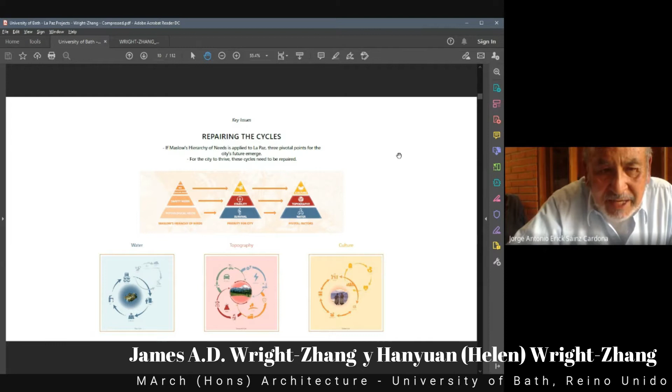So one of the key aspects we identify is water, and that poses the most existential threat to the city. Una de las primeras cosas que ellos identificaron es el agua, es algo que es lo más importante.

Through our research, it is discovered that the rainfall level will be more extreme in the coming 10 years. En los próximos 10 años, el agua va a escasear más de lo que está habiendo ahora. It means that during the rainy season, the rainfall level will increase, and during dry season, the rainfall level will decrease. Yes, it's going to be more extreme.

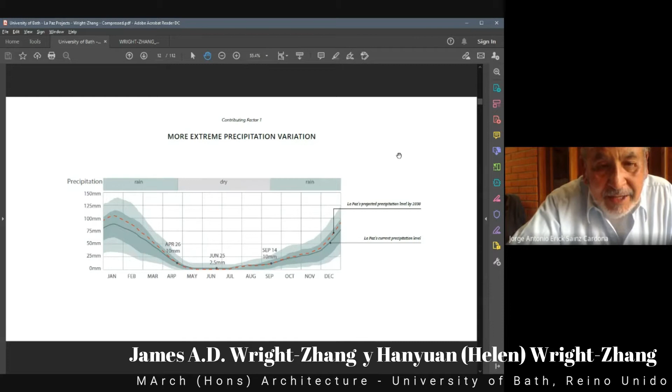And then the second contributing factor is the glacier melt. El hielo de los glaciares, de las montañas, va a bajar. Yes, and the research indicated that the nearby glacier has already retreated by 39% in the last 20 years and is predicted to disappear completely by 2040. Hasta ahora está reducida la producción, la llegada de agua en un 39%, pero se proyecta que para el 2040 ya no va a haber deshielos.

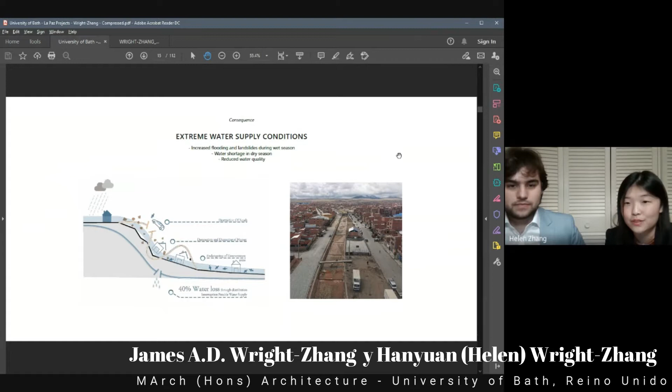So the disappearance will pose further threat to the La Paz water supply. Eso implica que está en peligro el suministro de agua a la ciudad de La Paz. And the third factor is the water contamination from factory, slaughterhouse, and living waste. La tercera parte es la contaminación del agua por los desechos y también por la contaminación de las fábricas. So all the three factors together, we felt that it's essential that we act now to help solve the water supply issues.

And the next special character we identified is, of course, the topography of La Paz. Lo que han identificado es la topografía de La Paz. As we all know, La Paz, built on mountainous landscape, offers one of the world's most astonishing city views. La Paz city sees dramatic height differences at different parts of the city, for example, El Alto, Max Paredes, and the center of the city.

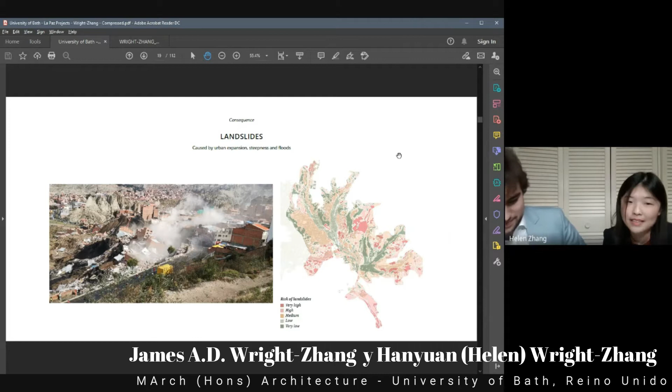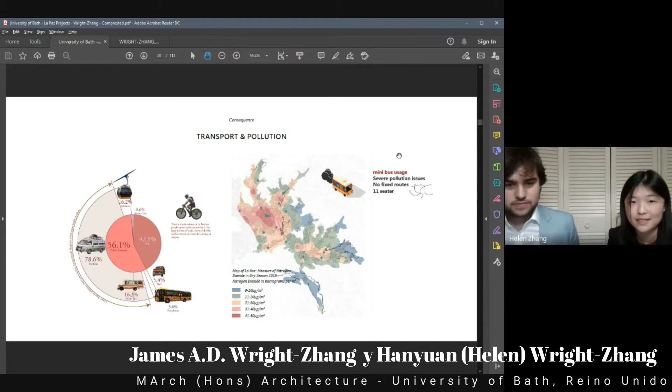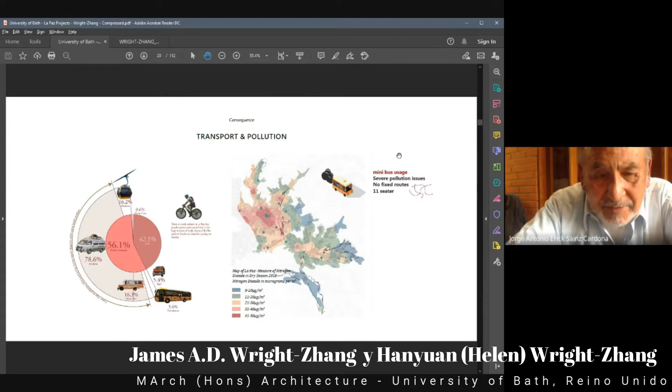However, it also causes issues. Together with urban expansion, the steepness and floods, La Paz has been experiencing a lot of landslides recently. A recently published risk map of La Paz indicates that much of the city is on medium to high risk of landslide. And the drastic change in levels, together with the use of minibuses, has also caused some pollution to the city center. Further, with the recent urban expansion, La Paz's greenery coverage has also reduced.

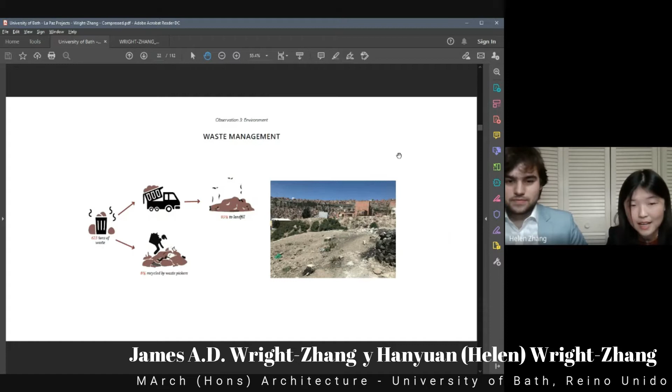Por el mismo hecho de la expansión de la ciudad en varias direcciones, ha ocasionado que la parte verde de la ciudad vaya reduciéndose considerablemente. Currently, La Paz has 3 square meters per capita of green space, and that's only a third of what the World Health Organization recommends of 9 square meters per person. And we also find out that only 8% of the waste has been recycled in La Paz.

And the third aspect we identify is the La Paz unique culture. Han identificado la cultura singular de La Paz.

As we all know, the Bolivian culture consists of a combination of Spanish, Incan, and other local cultures that make La Paz very unique in the world stage.

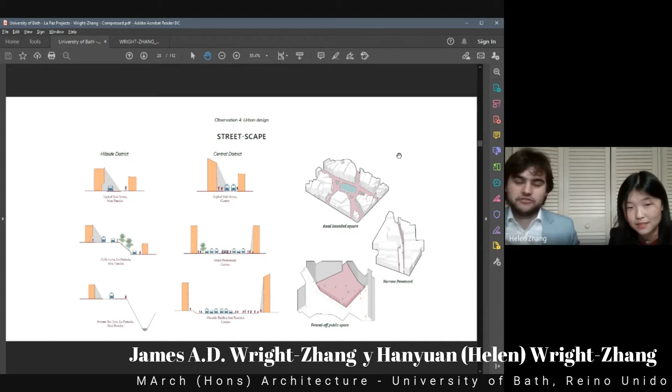What's the last part, Fran? I didn't... fenced off, have fences around them. Like, okay, I got it.

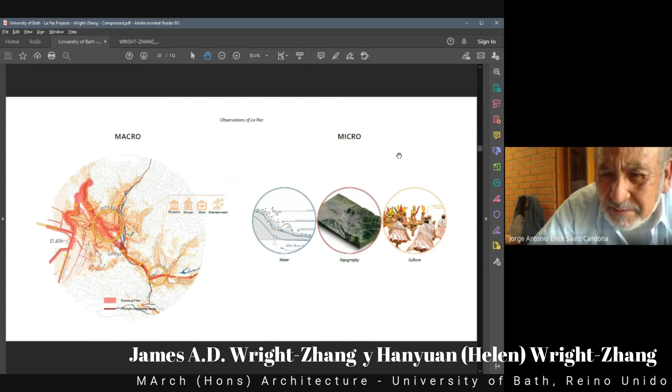Did you give me the three factors? Yeah, three factors we identified that we found to be most special about La Paz.

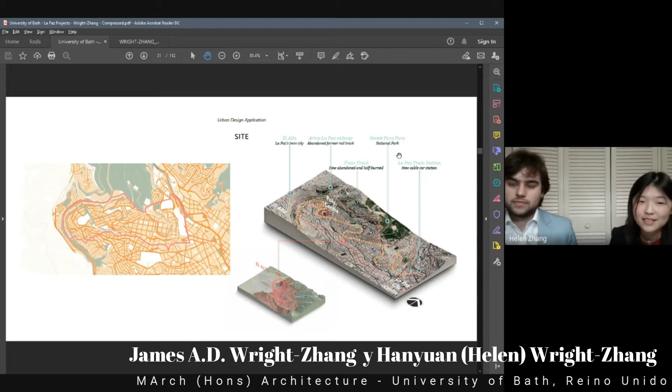We picked it because we felt that the site represents the three characteristics we identified of La Paz the best.

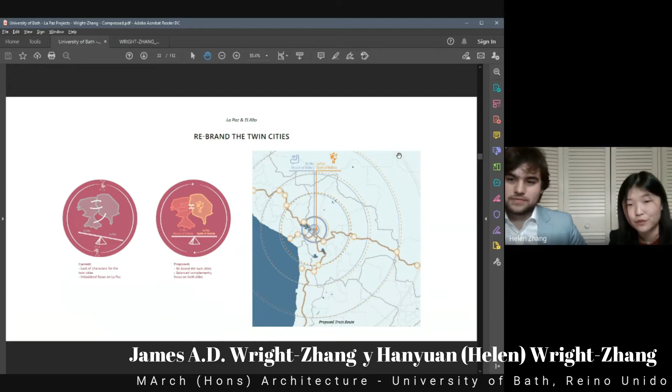For each other. And we also want the reintroduction of the train route going across La Paz, so that we can spread out La Paz and El Alto's influence not only to Bolivia but also to the continent.

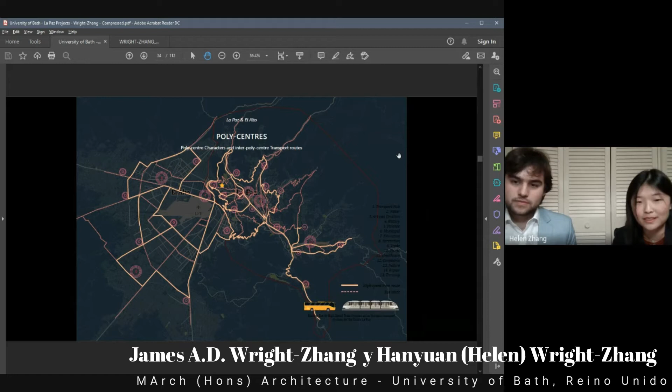And each polycenter can be linked with new public transport links such as bus or high-speed tram systems.

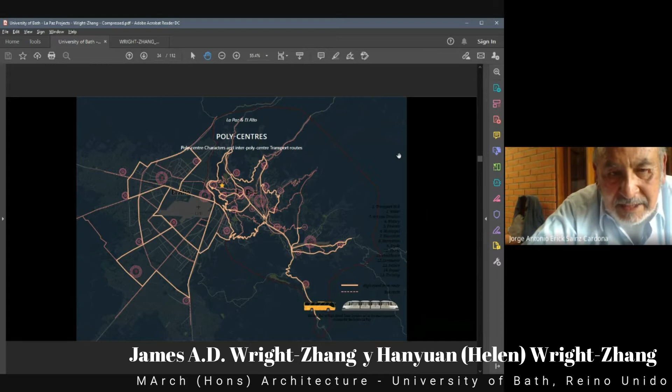And we are hoping to maximize the gateway location of our locale as the key linkage between El Alto and La Paz City.

You are hoping to what? To maximize the gateway location character of the locale as a key linkage between the two cities.

Yeah, my problem is I didn't understand the second part. Could you? So to essentially increase the connection between La Paz and El Alto through La Portada. A través de la portada quieren incrementar la conexión entre La Paz y El Alto.

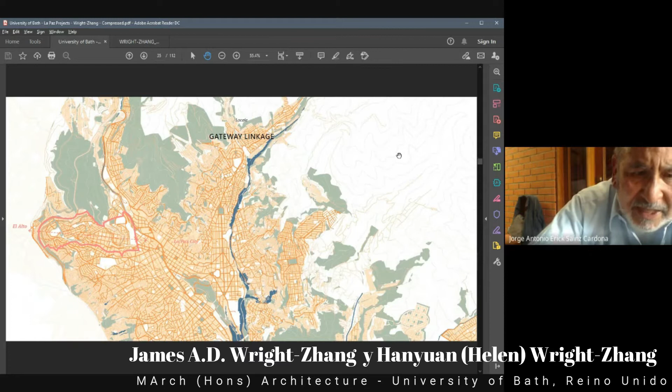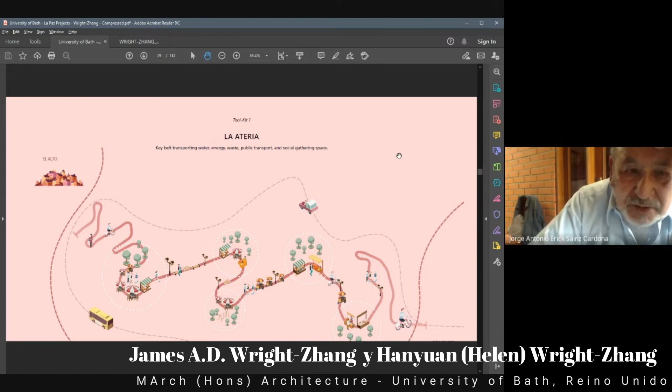And the second toolkit is the idea of superblock. Superblock is a series of 15-minute living zones providing essential service for the communities nearby. How many superblocks? We are proposing 10.

Okay, proponen 3 bloques. Within each district, a polycenter being a bigger superblock providing more district-wise public service. Alrededor de esos superbloques hay un superblock central que va a dirigir todo lo que hacen los otros superbloques pequeños.

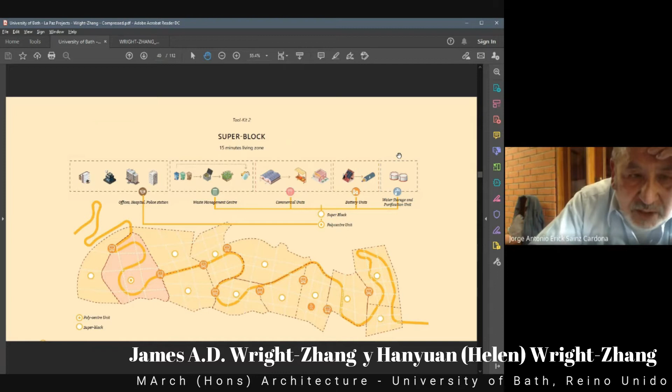And all the superblocks will be connected by the central artery. Y los otros superblocks estarán interconectados por el superblock central.

The superblock idea takes precedent from Barcelona. In Barcelona, they connect 9 blocks together as a mutual superblock and increase the pedestrian-friendly streetscape for the users. Tome como ejemplo Barcelona, donde han puesto 9 superblocks para facilitar el transporte pedestre.

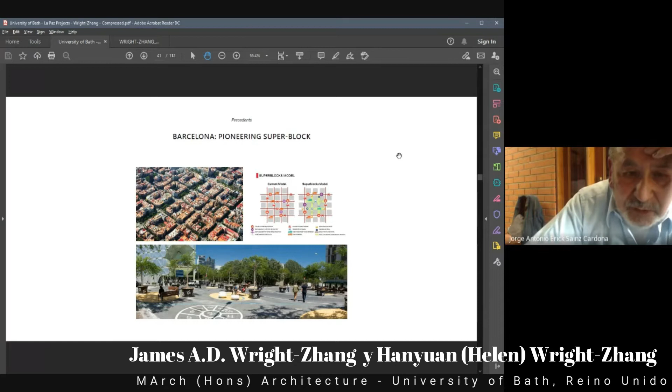And the last toolkit is a series of water networks linking not only the superblock level but the district level, and eventually creating a citywide level between El Alto and La Paz.

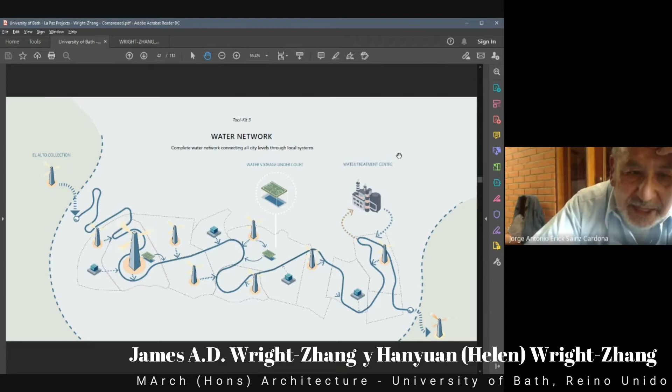I'm having difficulties with that last part, could you simplify it please? So the last toolkit is the water network that provides water. El último kit es un kit que suministra agua a la ciudad. The aim is to have a central water network that links the superblock, the district, and the cities together. Que tiene una red que une al superblock con la ciudad.

Here's a diagram showing how the water network can be used on a superblock level, showing functions such as rainwater collection, rainwater purification, rainwater storage, and rainwater usage. El diagrama muestra las distintas formas de recoger el agua, guardarla y distribuirla.

So essentially, we're hoping to apply these three toolkits to three aspects of characters we identified for La Paz, to help achieve the balanced cycle for different aspects in La Paz. Con estos tools, ellos esperan que se pueda conseguir una complementación de todo lo que hace a la ciudad. Entonces, estos tres kits permiten trabajar de la mejor forma posible.

And here's the master plan we drew to show the vision we have for the La Paz district. I'm sorry, I didn't get that, could you repeat it slowly? So this is the master plan we drew to show our urban design ideas applied in the La Paz district. Es el diseño que han hecho para la zona de la portada, en la que se va a usar el equipamiento y se va a construir el centro.

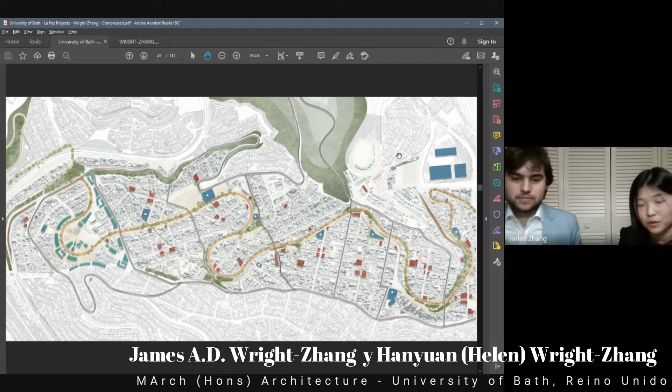So you can see different superblocks and polycenters linked together through the central artery, with the water network visible in all the superblocks, the artery linking the superblocks and the polycenters together. La arteria une al superblock con los pequeños superblocks que se han construido.

And so now we'll look more closely at how all of this integrates together.

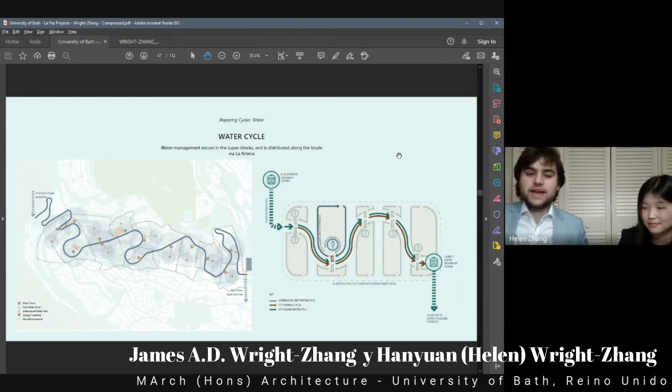Okay, and then all of these individual superblocks, water networks, are connected to the artery.

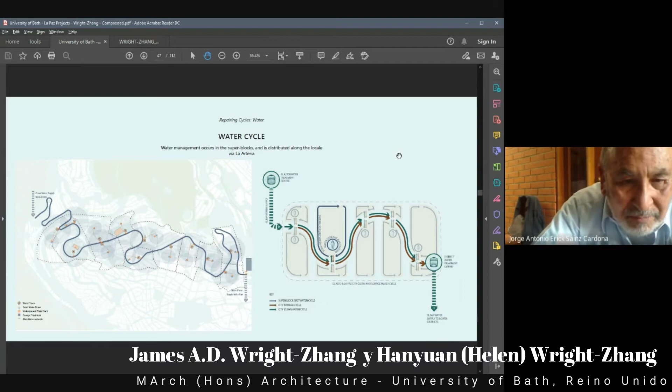Okay, and the water recycling and collection can have a major effect.

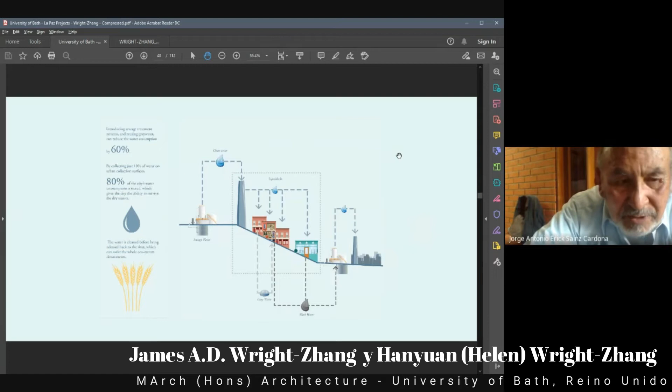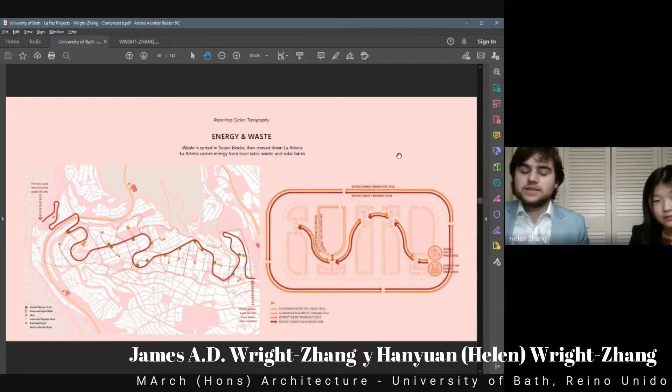These also connect to solar panels in each superblock, which help support the electricity network.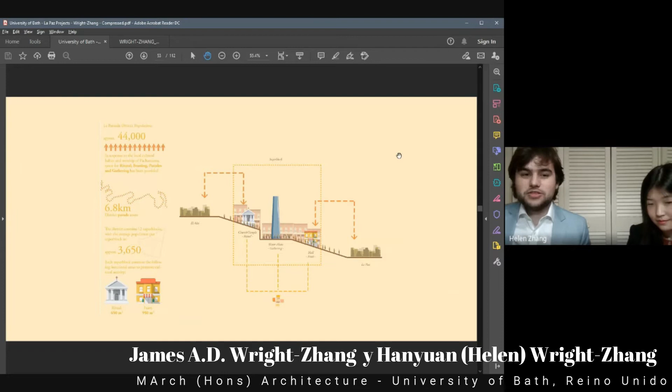Please repeat, I didn't catch. Sure. In addition to the potential for tourism, the new system would also help more markets and parades without affecting transport.

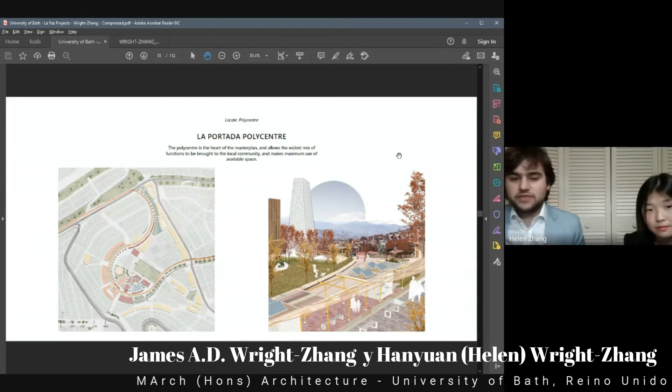We have the Polycenter at La Portada. It's got a lot of space for a wide diversity of functions, and these benefit from the great access it has to both La Paz and El Alto. The increased variety of functions happening throughout the day would improve community engagement and also security.

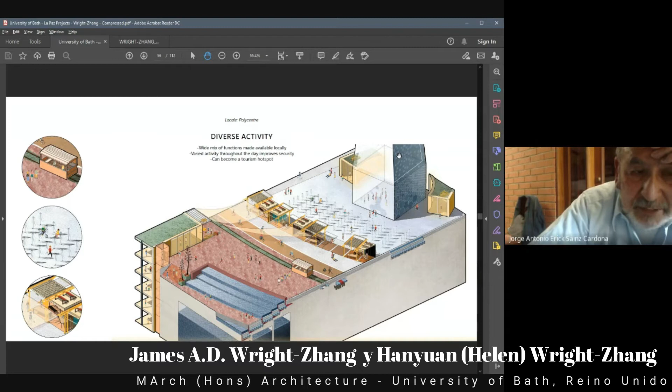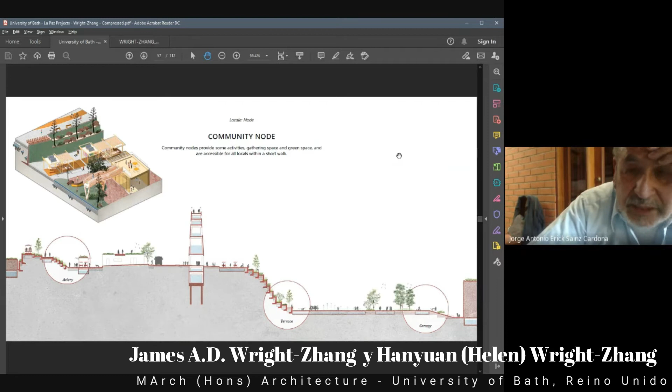When we move to each community node, community node, they provide gathering space and green space for all the people who live nearby, and good access to transport.

Along the artery, closer to the community nodes and Polycenter, there would be a higher density of activity.

These stretches would include the terraced gardens and planting allotments, and it would have the walking and cycling functions.

It has pedestrian functions and cycling functions in addition to a community structure for community work.

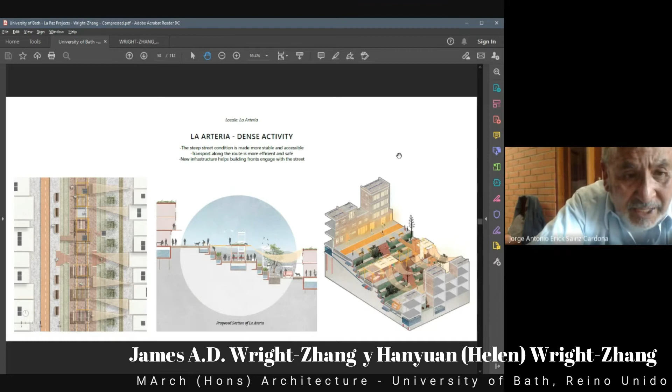The structure can be used for markets or any other use the community wants, and can help increase connection to the buildings nearby. And the increased activity would help with security as well. So across the section of the artery, it also has some underground functions.

Through the section under the ground, it has other functions, helping collect water, filter water, and transport services along the artery.

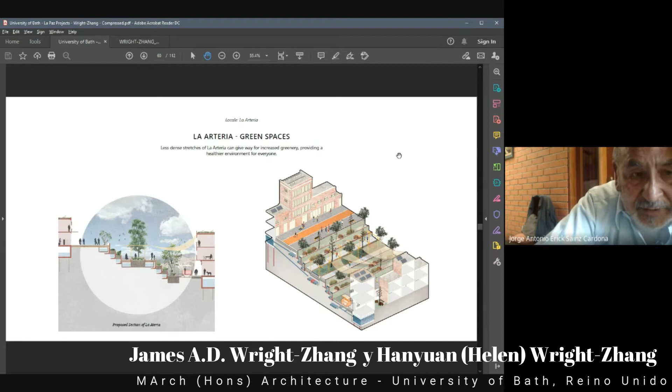In less dense areas of the artery, there would be potential for increased green space. These spaces would be good for a healthy environment and could be used by the community, who could help maintain it.

Now we're going to look a bit more closely at the details of these interventions. Everything we did, we wanted to be as multifunctional as possible, so it was cost effective and more applicable to the community.

They want all the elements to be multifunctional. This would help manage the cost and make it better at a community level.

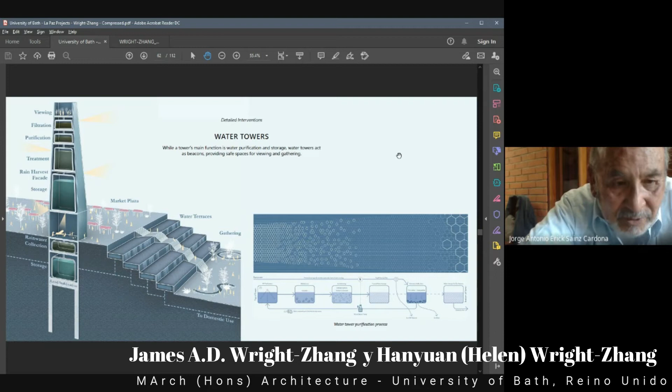The largest of these is the water towers, necessary for helping the water situation. Their main function is water purification and storage, but they can also act as important markers to help provide spaces for gathering.

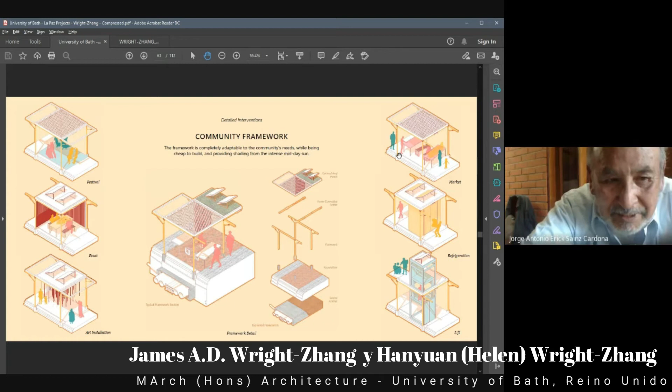The community system, the community framework, is a modular system which is quite cheap to make. It runs on top of the main service route along the artery, and provides shading during the day from the hot sun and also lighting at night for security. They can be adapted by the locals to suit what they need and want.

Then we have the landscape terraces, which help stabilize the hillside using planting and foundations. They also help naturally filter the water using gravity, purifying the water that runs underneath.

And then we have urban lighting at different scales. Connected to the furniture, we have smaller lights which illuminate at the street level.

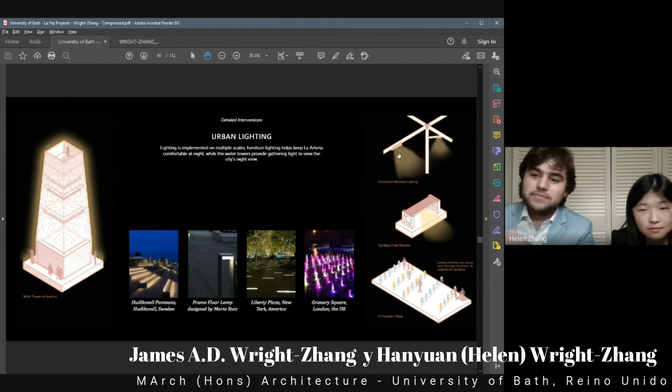Connected to the furniture, since we're in an open area, these are connected to the benches and furniture outside, providing light at night. The water towers can also light up to help provide a safe space for gathering, and at night you can see them lit up among the hillside.

We also looked at ways of using underused spaces below street level. These could be filled with small parks or small business opportunities, places for people to eat, sell things, or gather to talk.

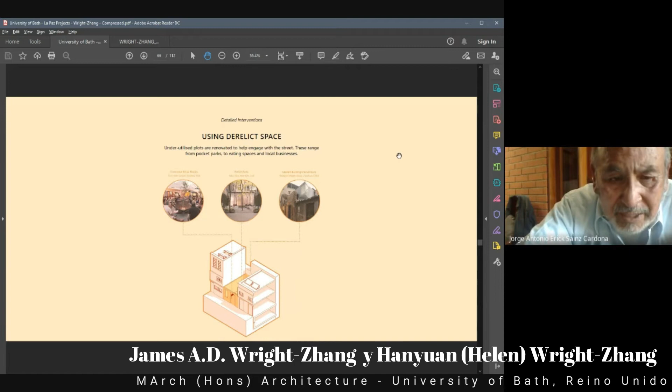And the increased density would help increase the number of people in the street, walking or working in these places. Then we have the bicycle and track system - if you look, there are open trams and closed trams with seats.

The bikes would be electric, connected to solar chargers near bus stops. They would move by batteries charged through the energy produced in the towers, so users don't have to exercise as hard going up and down. They would be available for the public to hire at a low cost and return when finished.

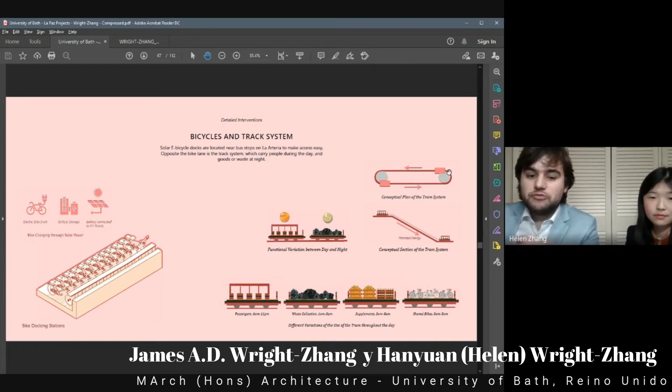The track system on the right would use the existing railway tracks currently buried under the road, which are not being used for anything now. This would mostly be powered by gravity and could move people, supplies, or rubbish up and down the artery, using an underground power supply.

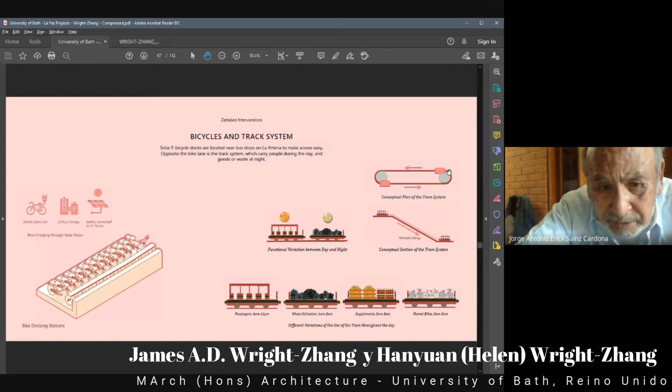Great, okay. So we've reached the end of the master plan presentation. Yeah, I'll be very quick.

So for the architecture project, I designed the Potato Center. Potato was first domesticated around La Paz 10,000 years ago and spread to the world.

Much of the local traditions were looked at to inform the design, drawing directly from the culture of the original peoples. However, recent climate change has reduced potato production.

So the aim of the design is to introduce a research center to look into how to improve potato cultivation and production.

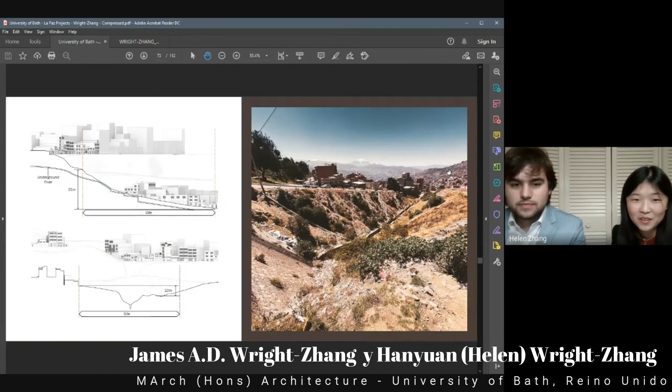That's the site - I'll just skip past. That's also the site, and loads of surrounding architecture and landscape were used as precedents, like the Valle de la Luna, Tiahuanaco, and the terrain.

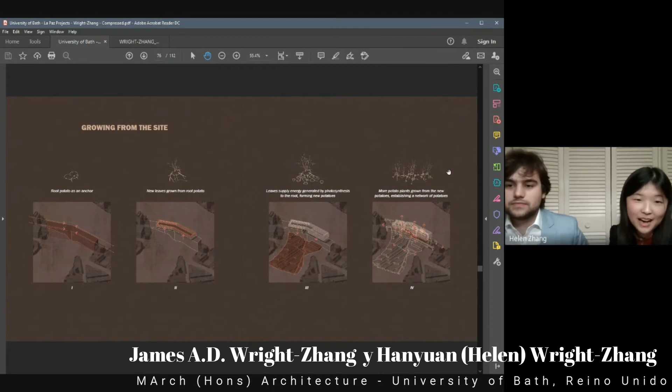And here it shows how different functions are arranged in accordance to their use, placed according to the functions they have.

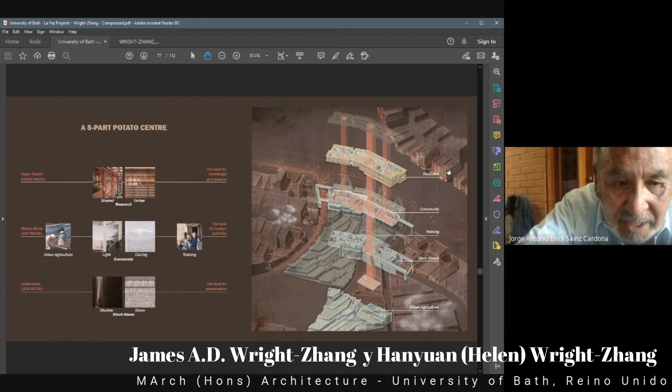And here's a visual showing how the building will be sitting on the site in the La Portada area - a view of how the building would look situated there.

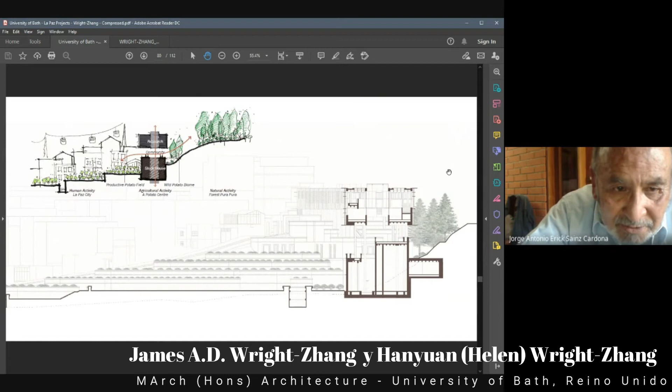Here is a section of the building showing its relation to the terrain and the people who are there. The community section sits between the research center and the stock house at the bottom, and that's where the entrance to the building is.

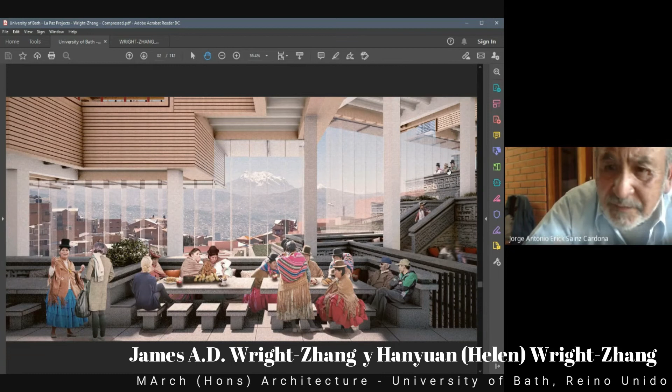The stock house part shows different functions of potato storage and cultivation process. This building shows where the potatoes are stored in their different locations, and the potato cultivation program.

This is a render looking up to the skylight, a view from below looking up at the storage center.

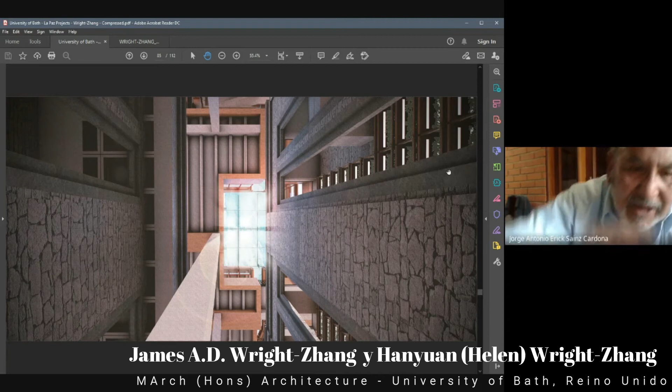There is also a planned training route allowing farmers and local residents to go to different parts of the building, showing how campesinos can move from one place to another in the center.

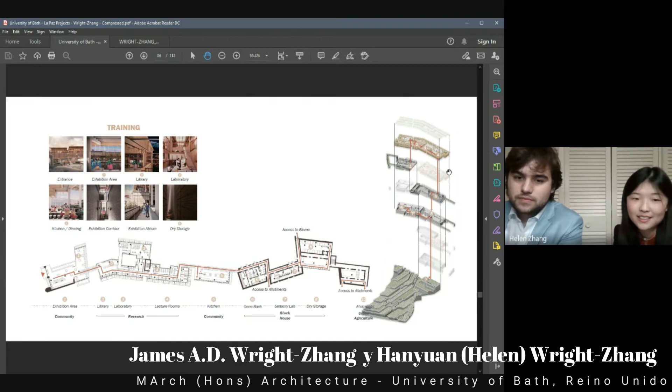In this way, hopefully the building can share with the community what it just learned so that it can benefit the wider agriculture industry, improving the way of working, storing, and cultivating potatoes.

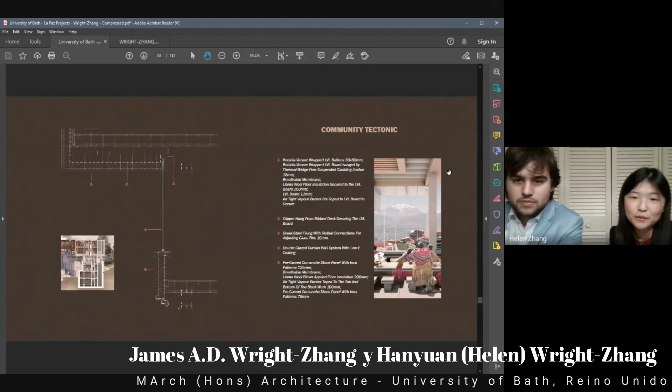Here are some tectonic drawings showing how the building will be built. This shows how the construction is done at distinct points, six points.

Here shows the structural strategy for the building.

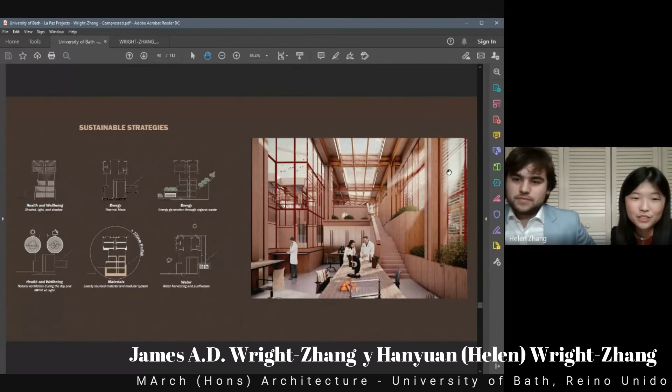Here shows the sustainable strategy to reduce the building's energy consumption.

Okay, I'll go through mine very quickly. Mine is the La Paz land use campus.

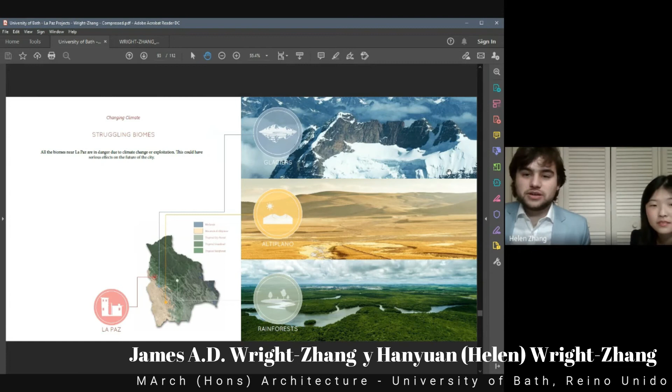Near La Paz there are mountains, the altiplano, and rainforests, all of which are at risk from climate change and exploitation, including the glaciers, the altiplano, and the Amazon. Technology is starting to help local people protect the land they live on.

Technology has begun to help protect the people who work and live in those places. One of the main functions of the building is to help collect this data so it can be used constructively, helping people use it in the best way possible.

In the same building there would be charity, research, and university education, where people work and give their advice at no cost.

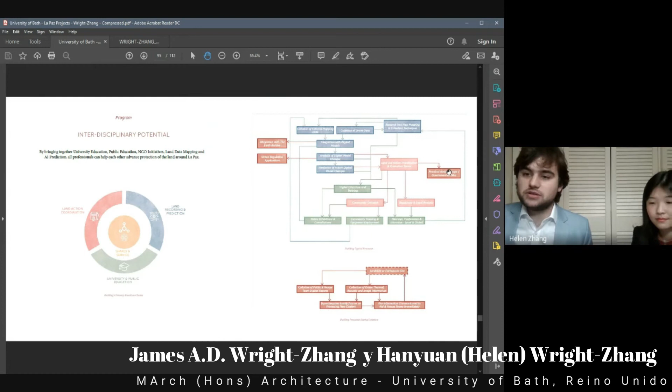Without cost, right? Yes, they help, and together they share information that they can use by being in the same building. This improves the center, using the information they share with each other — from the center to the people and the people to the center — for the better functioning of the center.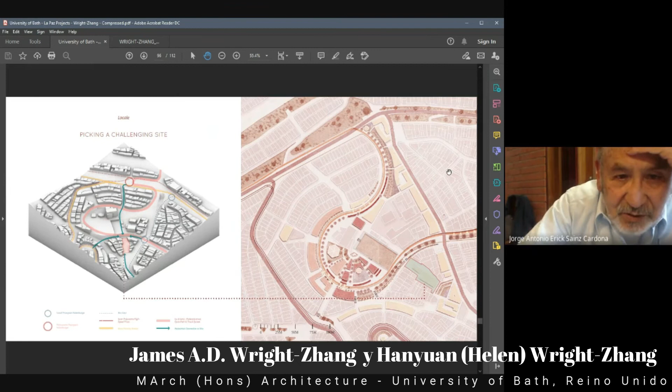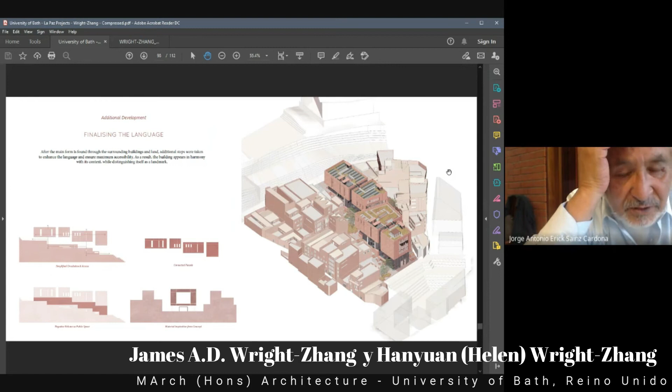The building was shaped according to the nearby buildings and also took inspiration from the land, so it shares a language with the other buildings nearby, but it's also different, with particular functions of its own.

This is what the building looks like when you approach it from the front. It has some space for gathering, and the building is split in terms of private and public functions.

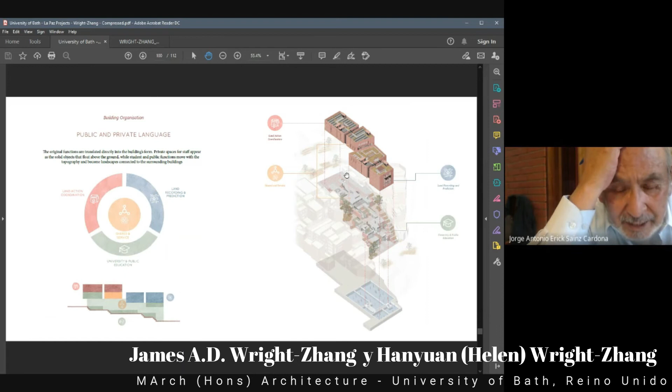El edificio está construido, se parte en dos funciones: una privada y otra pública para la gente. The solid bit above is where the staff work, la parte sólida de arriba. And the lower section is where students move around as well as the public, la sección de abajo.

And so you can see how the building steps down with the hillside, como el edificio se erige en la montaña en un declive. And it's the same across the site in the other direction, y es lo mismo en la otra dirección.

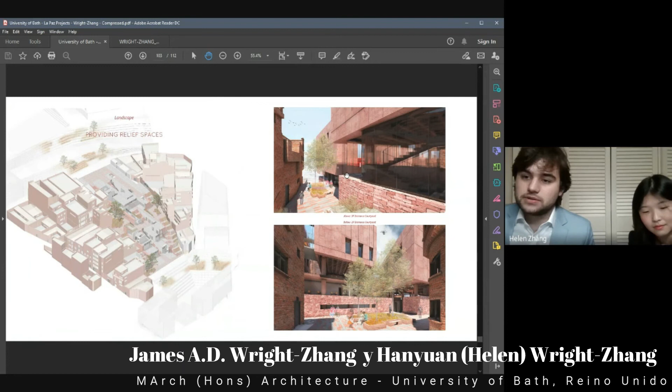And the building creates spaces, it creates squares for people to use who live nearby, el proyecto provee espacios de plazas para que la gente se mueva. And the inside spaces become available for public use outside of teaching hours, cuando no hay enseñanza en las aulas.

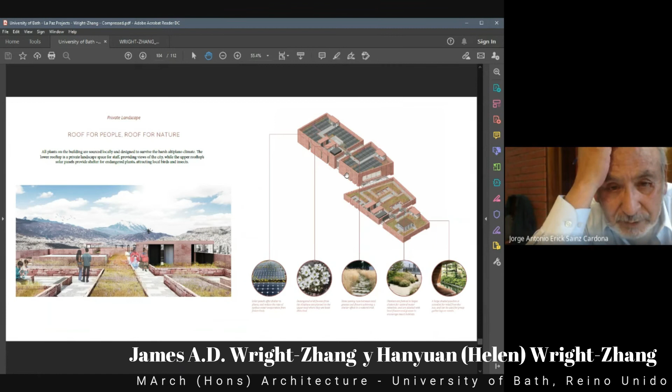And the structure of the building is built firmly into the ground to stabilize it, la estructura está incrustada en la tierra firmemente. And it's designed to absorb earthquakes, diseñada para sostener terremotos.

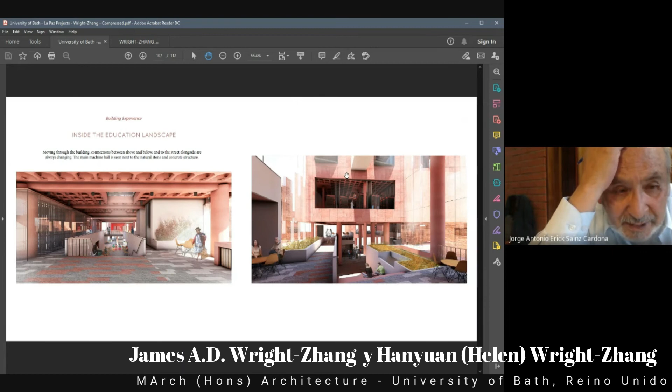So that's just a view through the middle of the building, una vista de la mitad del edificio. And this is the internal public and student landscape, la vista del salón de recreo de los estudiantes. And you can see up to some of the private spaces, las secciones privadas del edificio.

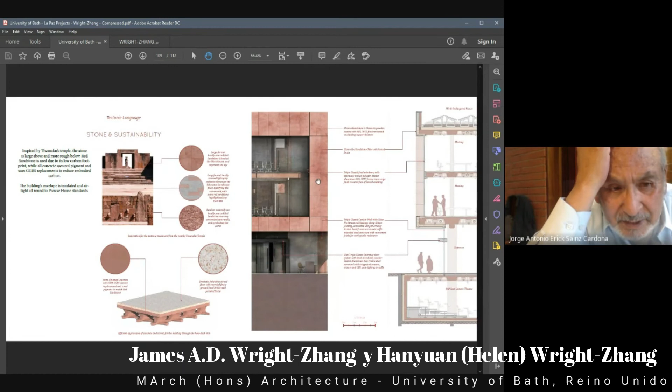And this is one of the main internal spaces. The building is made from local stone and takes inspiration from the Tiwanaku temple, large stones above and small rough stones below. Espacio privado inspirado en la cultura tiahuanacota.

The ground level uses natural stone shapes, la parte inferior usa piedra natural para sostener el edificio. And it's designed to very high environmental standards, para la sostenibilidad del medio ambiente.

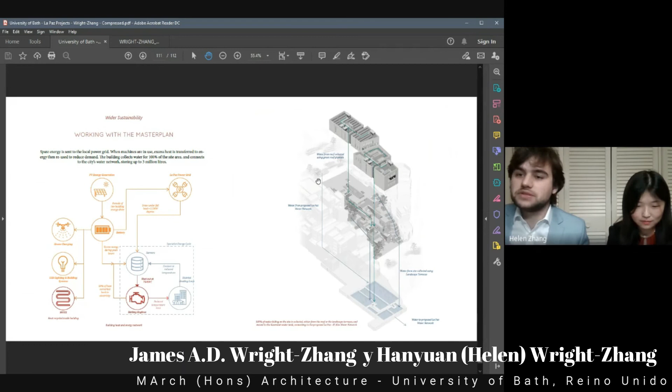And it connects to the local energy grid so it can supply electricity when the computers are not in use. Conecta a la red de electricidad local.

And then the building connects to the water networks in the master plan, en el plan maestro se conecta con la red de agua. And the whole site collects water and can store up to 3 million liters, puede recolectar y almacenar 3,000 metros cúbicos de agua.

And that's just a view from the bottom, es una vista desde abajo. So, thank you. That's everything.

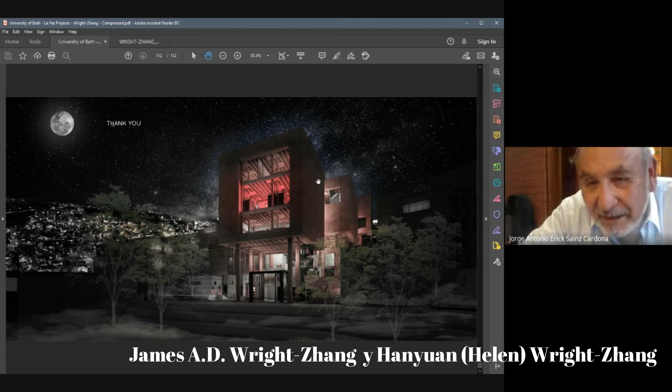Must be a tough job. Well, muchas gracias por la exposición, thank you very much for this exposition. Ha sido de gran aporte la propuesta que ustedes han hecho para repensar la ciudad, it's great help to think about what the city is going to need and do. Well, the city taught us a lot, la ciudad les ha enseñado mucho, dice.